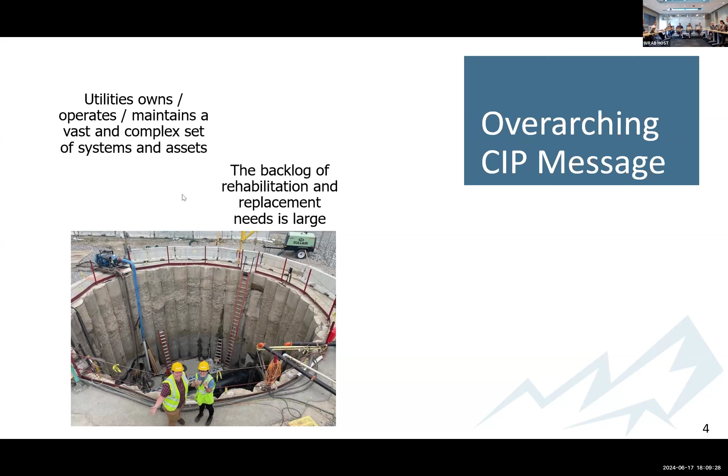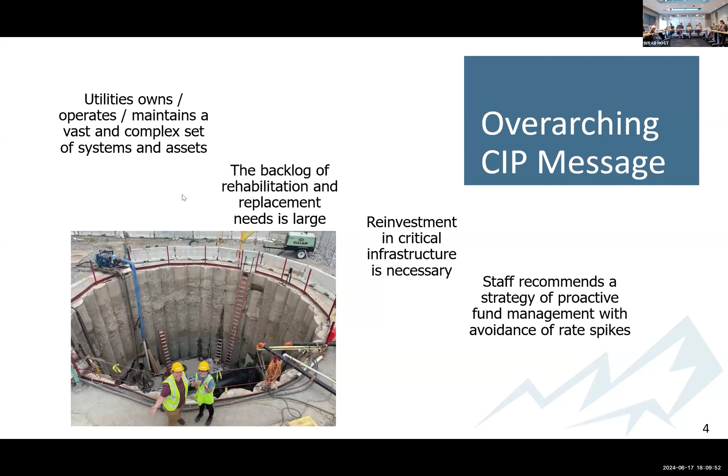As we've talked about in the past, on the capital improvement program, utilities owns a lot of assets and complex systems. There's a backlog of rehabilitation work, and that reinvestment is critical in those infrastructure needs. But then also within that critical nature, staff is making a recommendation on a proactive approach on funding those projects to minimize any significant rate spikes as we go through the program.

This first section, I wanted to touch base on the asset inventory and management system that the water utility uses. So each of the individual utilities, thinking about the thousands of pipelines, pumps, and the entire system, has a utility index score. That is combined into an overall utility index score as shown in the table at the bottom.

What do we do with that score? It's less about the actual utility index number and more about the trend of the numbers. We don't want a score of 100 - it's not really practical to have everything brand new all the time - but we also don't want a score of 0 in those categories either. So what we're trying to do right now is stop the decline of the numbers and flatten out that trend. Then in the long term, as the graph represents, we want to see an increase in that trend.

For instance, as we looked at the utility index score from last year, 2022 versus 2023, in the water system we went from 45 to 43. And in the source water system, we declined from 54 to 52. So what we've actually done is helped reduce the decline of those numbers.

One of the projects we'll talk about tonight is the 63rd Water Treatment Plant electrical and pumping system improvements, and that actually has been a big increase in the numbers. So therefore that treated water trend is not as much of a decline as we would have had without that project.

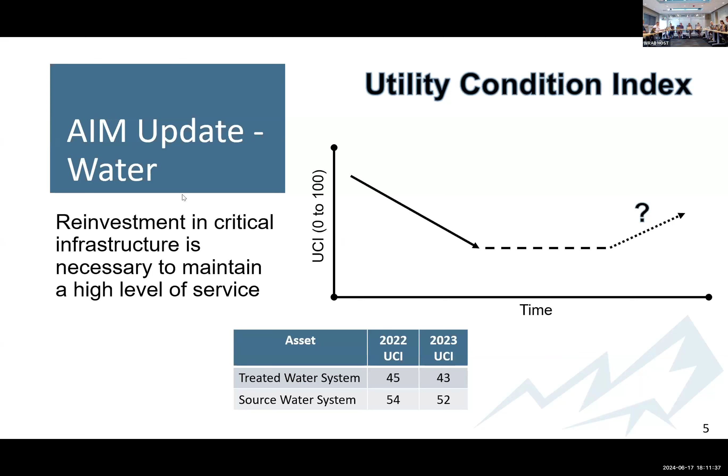On the wastewater side of things, we don't have a utility index, or an asset inventory and management program at this point. We're planning to complete that work in the coming years, and to prepare for that we're doing things like improving our data quality in our sewer model, correlating more GIS information from that program, and also creating an asset inventory at the water resource recovery facility.

We're also continuing the sanitary sewer lining program, represented by the map on the right. You can see on that map where the green pipes are either the pipes that have been lined or don't need to be lined. Then the red and the pink are those pipelines that need to be maintained in the coming years.

We've also looked at this in the context of the racial equity analysis the city has been conducting. The map behind the pipes shows that equity index scoring, where darker blue areas are lower priority for economic stress and need, and lighter blue areas are higher relative racial equity and diversity and economic stress. The sewer lining program addresses those areas remaining in the lighter blue zones, shown with a pink overlay. That's the type of analysis we use to decide which areas to address, not only from system need, but also from racial equity analysis need.

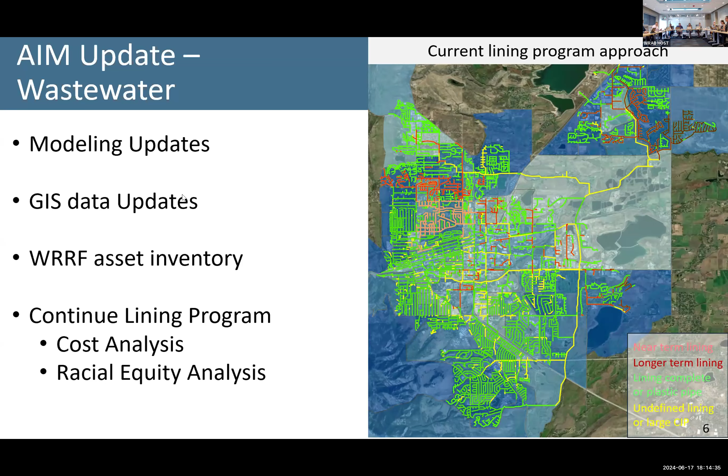Now I want to talk about the storm and flood utility, because it doesn't have an asset and inventory maintenance program. The primary goal isn't replacing existing facilities, but constructing new facilities identified in the 2022 comprehensive storm and flood master plan.

We did some analysis on that, and turned it into this longer-term 35-year capital improvement plan. I don't know if the board remembers, but we looked at a version of this graph about a year ago.

On the left are 36 projects identified from the comprehensive storm and flood master plan, arranged geographically. On the right, we've taken 30 of those projects that are in the longer-term range starting at 2030, and prioritized them based on the analysis method we developed in the storm and flood master plan.

There are 6 projects that aren't on that list, and those are ones we're actually pursuing as part of the current 2024 to 2029 capital improvement program. So that's where there's a disconnect between what came out in the comprehensive storm flood master plan and where we are today.

We've divided them up by colors into blocks of 10 to help you understand the next slide, because we've taken those individual 30 project reaches and lumped them into construction projects.

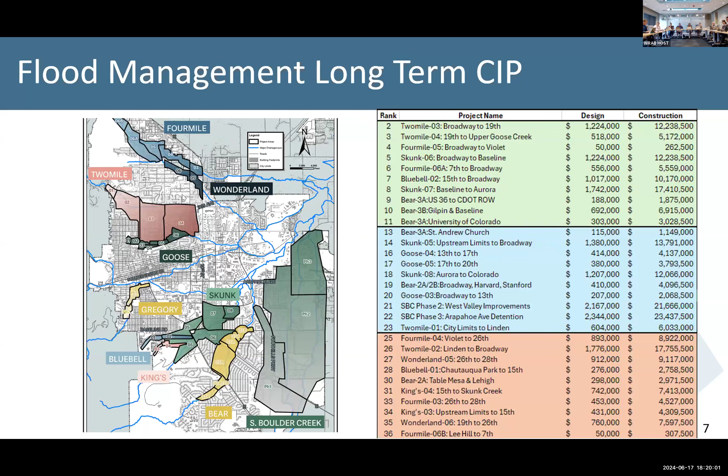You might see in the Schedule 7 memo that there may be a disconnect between some of these prices versus what we're showing in the schedule. The other thing is that once we rank these projects, we're adding an inflation factor, since we're talking about such a long construction period, to where the planned construction dollars are more just because of that time delay.

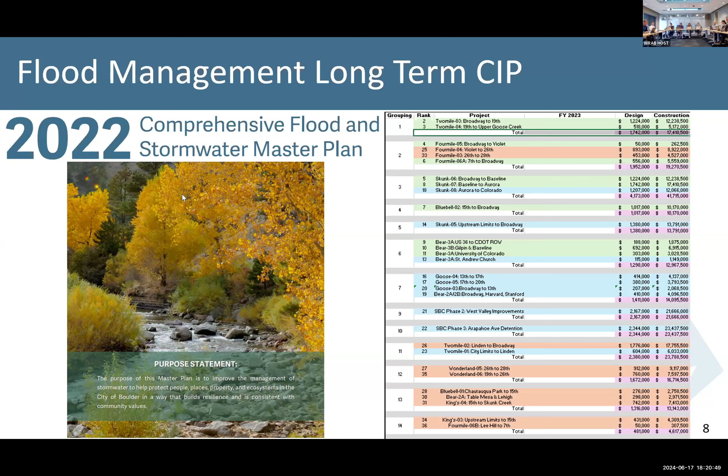Now I'd like to move on to some of those key projects that Joe mentioned. First, I wanted to start out with the general structure here, which is we're dividing it up by utility, and we'll pause after we talk about each of the utility sections. So the first group is the source water utility.

We have some ongoing projects on the Albion Dam and the Barker Gravity Pipeline that we've spent the last several years talking to the board about, and those projects are progressing. One thing to point out is we're working with the design team and the consultant team looking at doing an additional raise on the Albion Dam project, so we're still in that design component, which may add another construction season.

On the Barker Gravity Pipeline, that's the one where we're doing small sections of line every year. It's been working since 2017 and is projected to be completed in 2029. I wanted to show the picture on the right, which shows the tight corridor we're working in—you can see the bench in this picture, and that's where the pipeline's going. So this lining program really makes sense for minimizing our impacts.

The other big thing we talked about a little in May is we're looking at projects in the outer years of the CIP based on the 2020 Colorado Dam regulation safety changes. With that came some changes the state of Colorado came up with, so we're evaluating our dams related to hydraulic hazard of the dam, seismic design requirements, and hydrologic model requirements. It's a different change in how the regulatory agency wants to look at additional data, so we're taking that and looking at it right now.

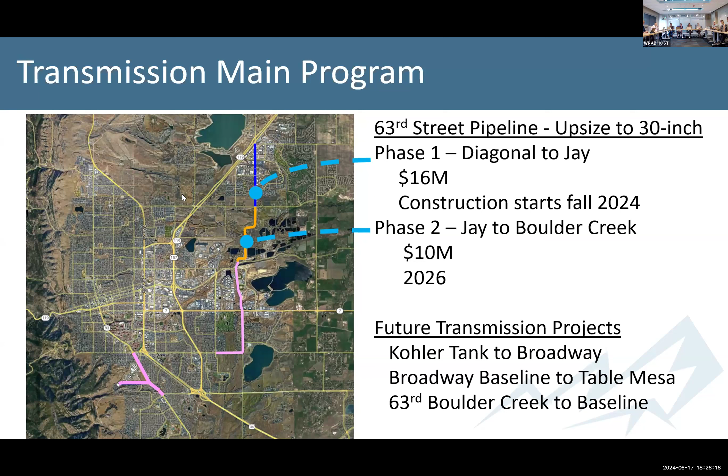The storage tank system is the buffer between the treatment plant and the transmission system. These tanks manage the changes in our water demand over the course of the day. These tank projects will occur in later years of the CIP.

We need to complete the water treatment facility work first, but these tank projects also have longer lead times and require a lot more interdepartmental, customer, and community coordination. We're looking at beginning preliminary design work on the tank near Chautauqua in the Chautauqua area in 2025, and then adding a new storage tank in the East Boulder area, with preliminary work starting in 2026.

That's the update on projects in the water treatment system. Certainly want to pause and see if the board has any questions related to the water system projects.

In the May meeting, you had the green, yellow, red diagram. That was very helpful. Can you speak to the status of 63rd and Betasso after these projects? Will we be more green and yellow?

63rd and Betasso will definitely move more toward that green end. If you remember when we talked in May, that was, for instance, the concept of the utility condition index score. The 63rd treatment plant last year was at a 53 score, and typically there's always a decline every year just because of aging. But because of upgrading the pumping and piping systems, we actually increased that score up to a 59, which adds it into that green zone.

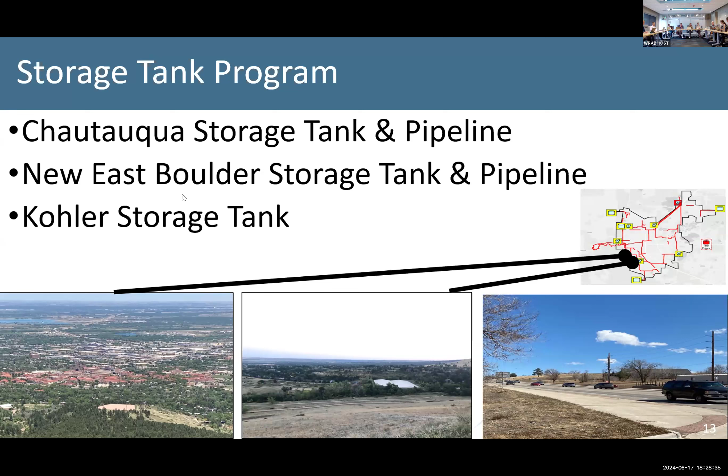On the Albion project, I think the note said you had decided to raise that a little further because of some additional water rights or something? Yes, what we're looking at with the Albion Dam is, after doing the analysis, we have more storage rights in that dam than we've historically been taking advantage of. That was really a combination of some things we found during the construction project. So that's where we're looking at that raise, because from that, can we take advantage of our water rights?

I didn't quite understand why the availability of those rights wasn't known originally, or what changed in the middle of the project. What really changed is we did a survey of the storage volume once the reservoir had been drained, and we realized we didn't have the storage volume we thought, frankly, from the old timers when they put the reservoir in. Initially there was a disconnect between that survey information.

How big a difference was it? It's approximately 300 acre feet. And in that context, very generally speaking, industry-wide, not necessarily Boulder-wide, that's about the amount of water that 600 homes use in a given year. That's a fairly significant percentage of what you thought the capacity was, right? It certainly is. That's where, as we gain new information, we look at whether it makes sense, particularly because we're here and working with the contractor to take advantage of that.

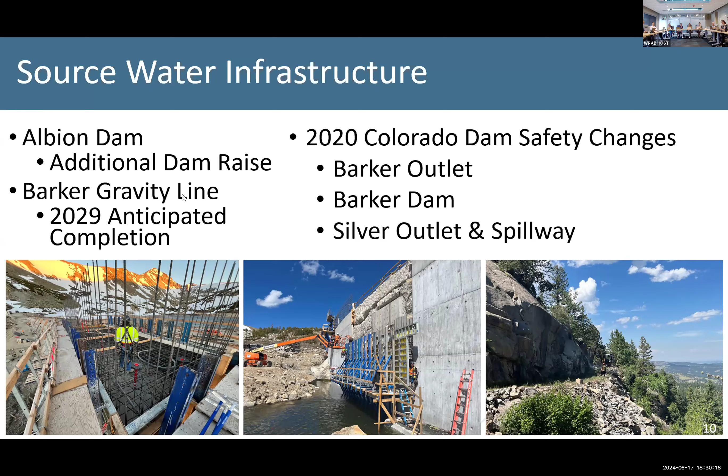Okay, now onto the wastewater system. So a few slides on the wastewater system, updating the main sewer interceptor phase 2 project. This is the sewer line that's carrying about 85% of the city's wastewater.

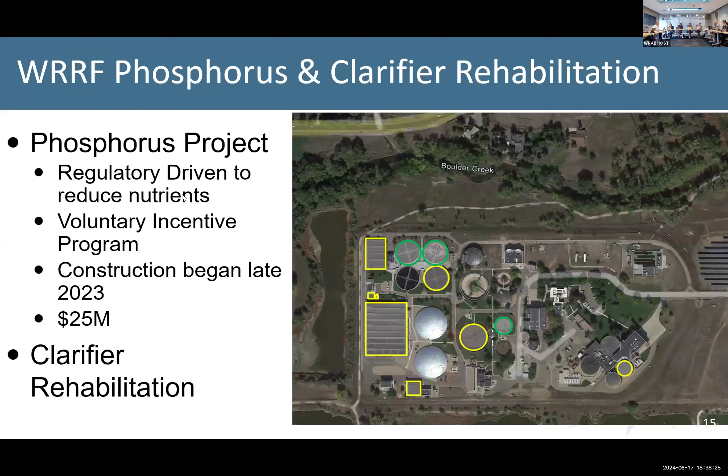There may be large scale, very different options of a way to approach something and cost implications. Again, pointing to the main sewer project, we could have done an open trench, closed down Valmont Road for half a year or a year, done an open trench and installed the pipe that way. Almost every project we do has quite a bit of variability in terms of the ways we could do it. We look at the pros and cons and trade-offs, and work with our consultants who are always helping us on these large scale things to dial in on a recommended alternative.

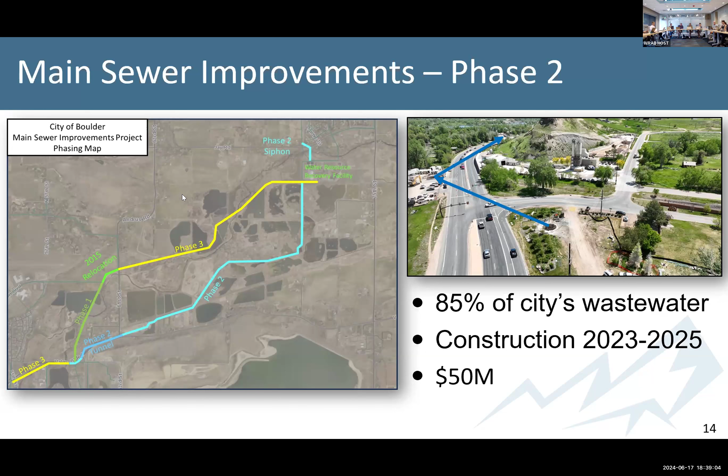Okay, now I wanted to shift to the storm and flood utility. We'll talk about some of those projects. The first project I wanted to touch base on was the South Boulder Creek project.

From a flood perspective, it's a pretty straightforward project. It gets complicated quickly, but generally speaking, it includes an earthen dam, which you can see in that brownish orange. There's a concrete spillway wall for overflow, running parallel to US 36. And then we have an outlet works, the yellow line there, that conveys the water from the flood storage eventually back to South Boulder Creek.

Recently we've been through a process with City Council of disposing some of the project area that was under Open Space and Mountain Parks control, and also gone through an annexation project for portions of the project. We're currently working with the consulting team on the 90% design and obtaining permits, getting this project ready to bid.

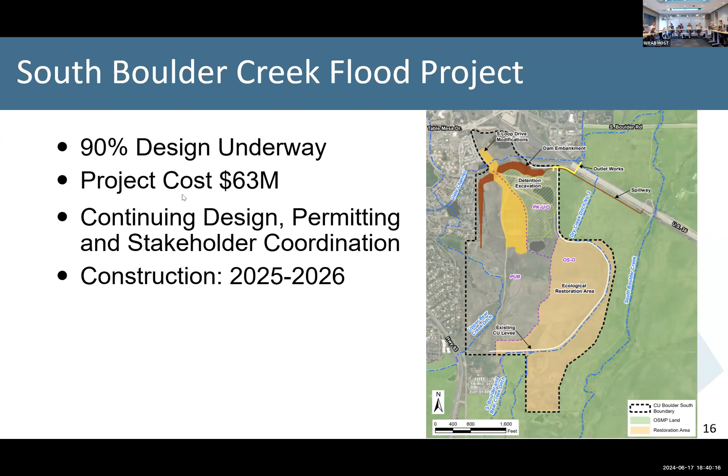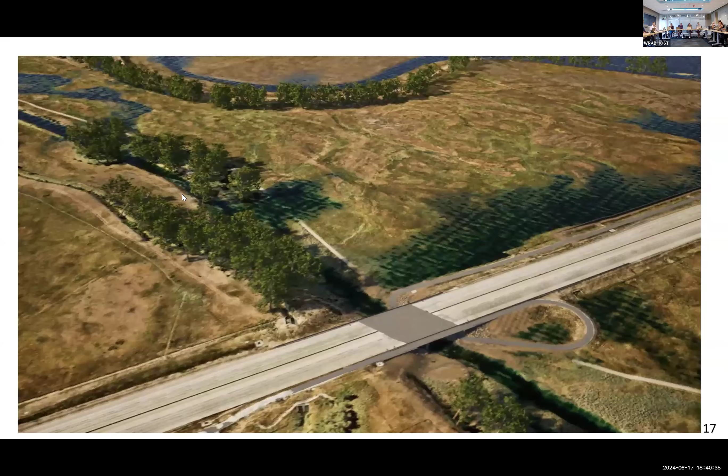What I wanted to show on this next slide is a video we created of what the project will look like when flooding does happen. So here we're sitting at South Boulder Creek and US 36 on the east side of the project. As we go through this, we can see where the flooding will occur, and along 36 there's that flood spillway wall. It ends up with the outlet works that eventually go back to South Boulder Creek.

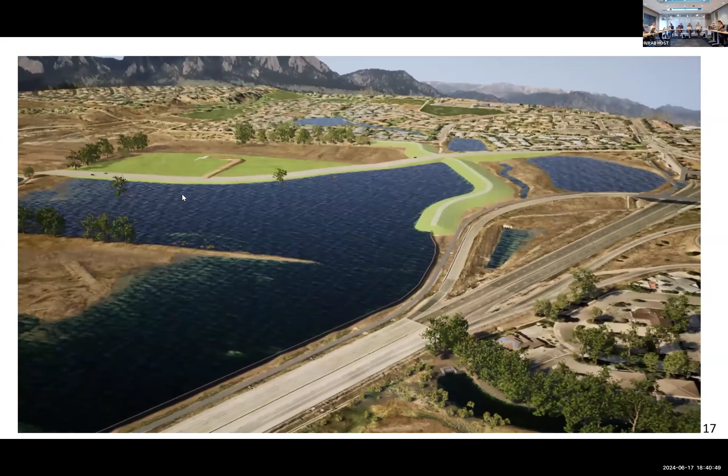You can see the dam in the background, and now we'll pivot over to the Table Mesa and US 36 area and look at the project looking back towards the south. With the green is that embankment, earthen embankment dam.

If I might add to that, just quickly, sorry to interrupt the flow, but that's what it'll look like when there's a storm and a flood. It'll be holding back water, but it'll generally be dry. The outlet works that Chris talked about will drain all of that water eventually, and it'll stay dry. That goes under the road somewhere right after the exit or entry ramp there. Yes, if you see the trees on the left there, that outlet works is really right there over on the trees.

The $63 million bond, I think in the memo it says that's for next year, and this table is for 2024. We did in 2024, if you remember when we talked to WRAB last year, it was looking at that construction time. We did talk about bonding, we were thinking we'd be bonding in late 2024, going to construction. We're now looking at construction in 2025. So we're trying to time the bonding appropriately as we look at the bonding market and looking forward, if we want to bond in conjunction.

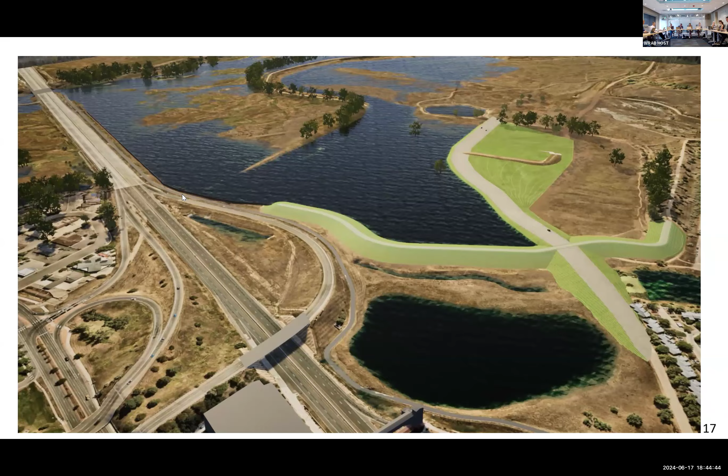So the next project I wanted to talk about is the Gregory Canyon Creek flood project. We haven't talked a lot to the board about this compared to some of the other projects we've done in future years, so I wanted to spend a little more time getting you up to speed on where we are.

Gregory Canyon Creek enters the city limits near Chautauqua Park and drains and travels to the confluence with Boulder Creek near the intersection of 9th and Arapahoe, through the western part of the hill area. That's a highly developed area, and we have a steep drainage, so we have a very narrow channel in that particular area.

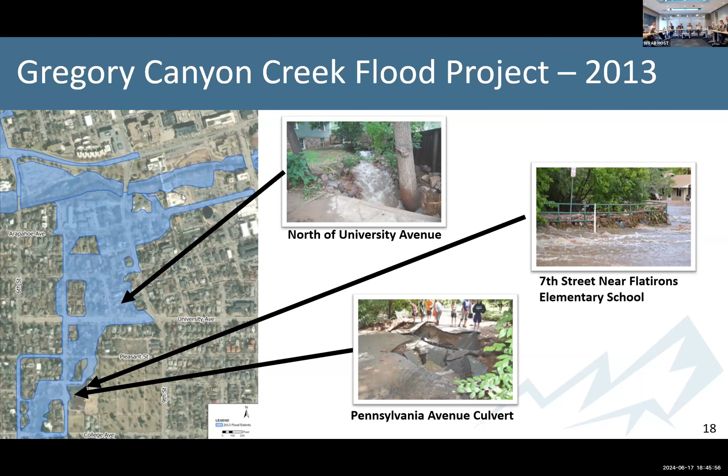As you can see on the map, the blue is the limits that we surveyed during the 2013 flood, which we estimated at a 40 to 50-year storm event. The other part is that channel has several very narrow road crossings, so a lot of those culverts became blocked, and we did have extensive stream flooding. These photos show some of the damage that happened during the 2013 flood.

So we're currently in the midst of the detailed design of that project, which also includes an easement acquisition process, which we're looking to begin coordinating with the impacted homeowners where this creek travels through, later this summer.

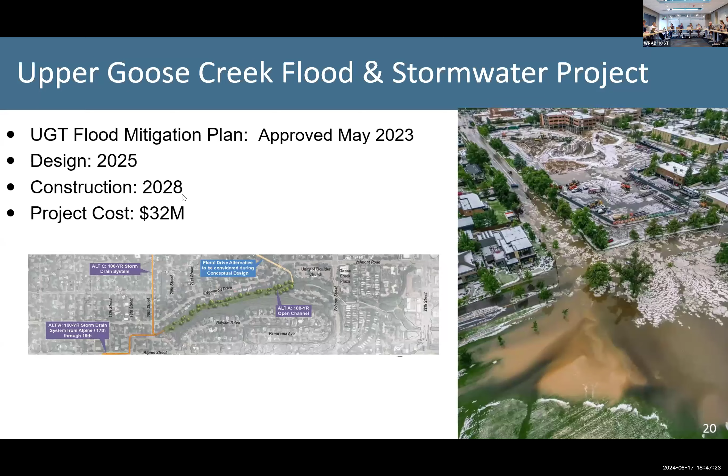I was just curious about the council approving a plan in 2015, then design starting in 2021 — just curious about the history of that gap. It was primarily there were some staffing changes and issues, and really a big impact was COVID.

But some of that gap time is also sometimes we do have gaps between that mitigation plan approval and the conceptual stage where we're diving into the detailed design. And then I saw City Council on Thursday discussing the property easement acquisition, and I was just curious if you could talk about that and what impacts that might have on the project. Yeah, I was thinking about mentioning that under matters as well, but we can cover it here.

So anytime we have one of these projects in utilities, a flood project where we need easements, there are certain procedures that go with those. With transportation projects as well, there can be circumstances where we might have to condemn a property, maybe something to do with ownership. We really try to negotiate with property owners and have been successful in avoiding those types of actions. But it's been the city's practice to go to council before we start into those processes to ask them for that authority, in the unlikely event it's needed. So that's what that is.

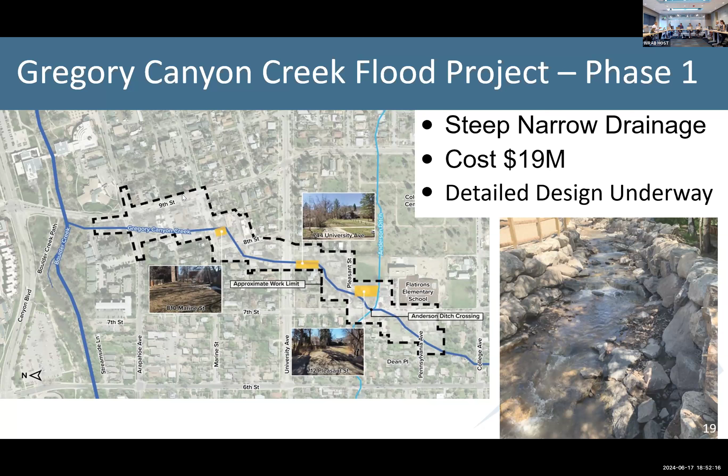It's a great question. If people have been up to Nederland, about 20 miles up Boulder Canyon, we have Barker Reservoir - it's Middle Boulder Creek that's the drainage that starts up there in Nederland. Every year we draw down that reservoir in the wintertime when there's not a lot of precipitation, or there's snow, so we're drawing it down and it gets lower and lower. Then in the spring, the snow melts, the runoff starts, and it fills back up. When it gets to the point of hitting the spillway, water starts to spill over. We can control it with valves until that point, but once it hits the spillway, whatever's coming in goes over. We still use the valves and have control, but the scale changes really quickly in terms of how much control we have over what's in the creek.

There was an unfortunate tragedy last year with some deaths in the creek, and it's a topic of discussion with city council, multiple departments involved - fire department, police, our department, parks and recreation - because a lot of the city is a park. We're thinking about how to communicate with the public about the risks, but also how to give access to people who are skilled, like whitewater rafters. This is the time of year for that, so we're making sure we're carefully messaging all of that.

Have your water quality folks ever tried to calculate how much we might be losing - like if there was a reservoir somewhere at the bottom of the canyon that we could capture some of that? How much are we losing on an annual basis if we get to a point in the future where we're starting to get tight on the rates? We know what the volume of water is that's in Boulder Creek, what we're taking and what goes downstream. I don't remember the scale of those numbers off the top of my head, but we're also constantly perfecting our water rights portfolio and have applications in progress, including some to capture water much further downstream and use it in different ways. So we do pay attention to that.

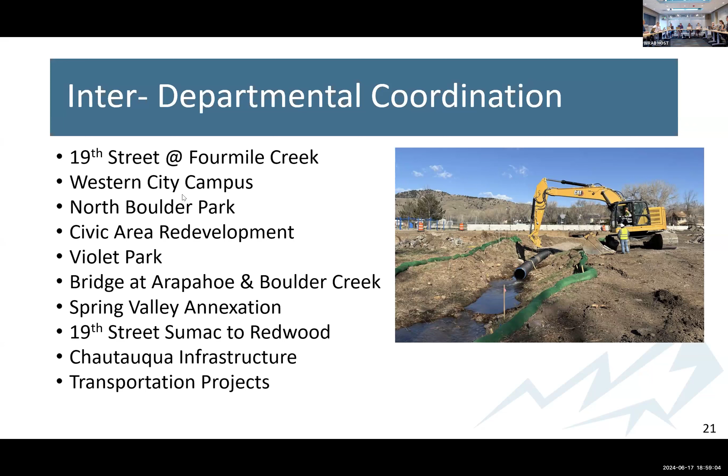I would just say, Chris, and for the board, I know that's a lot. We had the May presentation where Chris walked through all the different systems that are part of each utility. So we're really looking at the condition of things, prioritizing, and putting the most urgent needs first. I always think of it like a giant musical mixing board, looking at all the factors and how we bring these forward. There's several billion dollars worth of infrastructure we're responsible for, and we're trying to reinvest in that in a way that's manageable for us to do the projects and manageable for the community in terms of rates. But I realize it's a lot for the board to take in as well.

I have one question, maybe this will get to your presentation, but in the memo there's an anticipated revenue bond section for the 2025-2030 CIP, and it just has three bonds for water and wastewater and then one for South Boulder Creek, but there's more bonds in the tables. I was just curious, am I reading that correctly, or is this a misread? No, that's a good catch. I think you're talking about maybe the Spring Valley annexation, that's one of them for water and wastewater. Yeah, and there's a $79 million bond for Barker, Arapahoe Trunk sewer replacement, and the WRRF temperature, and then South Boulder Creek. But there's more bonds in the 2025-2030 CIP, so I was just confused why those were highlighted.

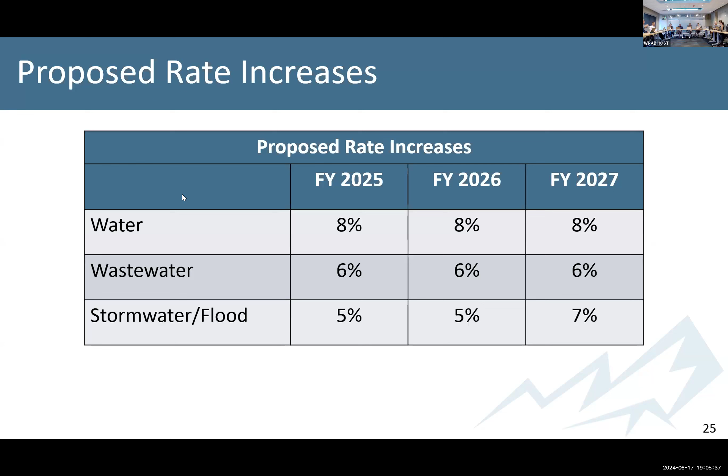Is this averaged across the year, or is it a particular season? Yeah, it's a good question. So it's for a single family home. The assumptions are a 4,000 gallon winter average and 90,000 gallon consumption over the course of the year.